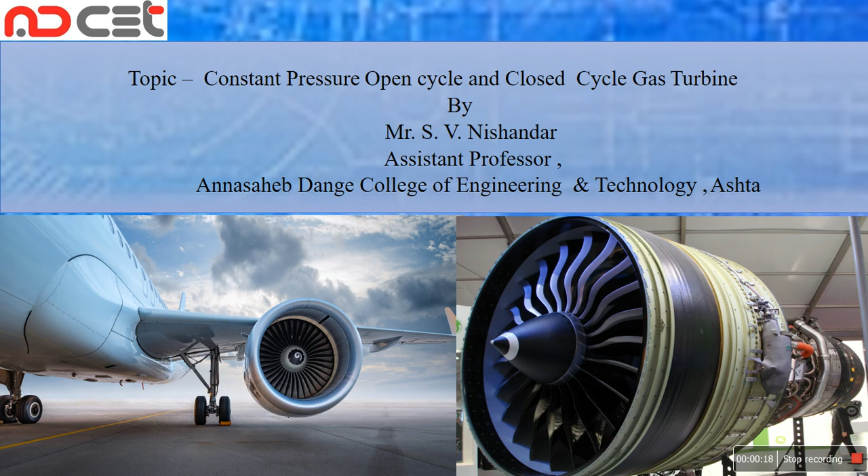In the last lecture, we started a new topic: gas turbine and jet propulsion. Please go through the previous video. Today we cover the remaining part of the constant pressure open cycle gas turbine and the closed cycle gas turbine. In the previous lecture, we discussed the classifications on the basis of operation. Let me briefly revise: open cycle, closed cycle, and which thermodynamic cycle it works on, maybe Brayton, Atkinson, or Ericsson.

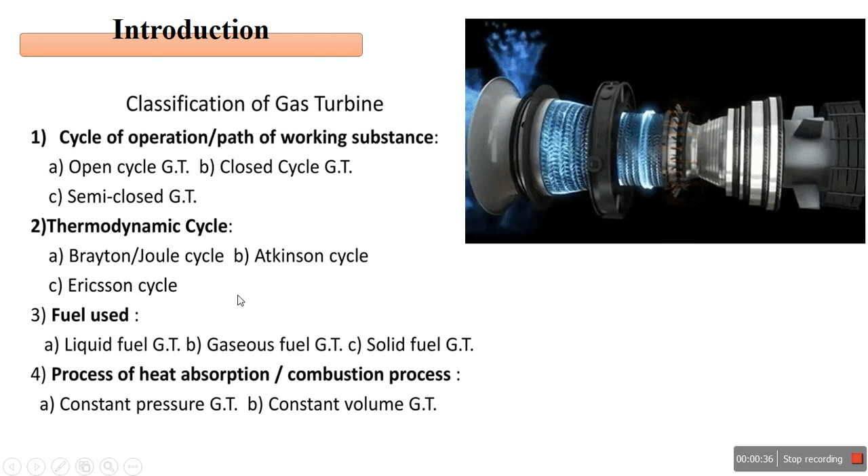The constant pressure open cycle gas turbine consists of three main components: compressor, combustion chamber, and the gas turbine. There are two applications, one is in the wings of aeroplanes as turboprop engines, and it is also utilized in stationary electric grids for generating electricity.

If we draw the open cycle gas turbine PV-TS diagram, a number of students make the mistake of joining the line from 4 to 1, because the cycle is open. The exhaust from the turbine can't be used again and again.

From 1 to 2 there is isentropic compression, carried out by an axial flow compressor or a centrifugal compressor. I'll show in animation the axial flow compressor. If you observe, a number of blades are mounted on a shaft. Some blades are alternately stationary and some are rotating continuously. Mostly the stationary blades are placed in the casing and the rotating blades are mounted on the shaft. That is the axial flow compressor. So 1 to 2 is isentropic compression.

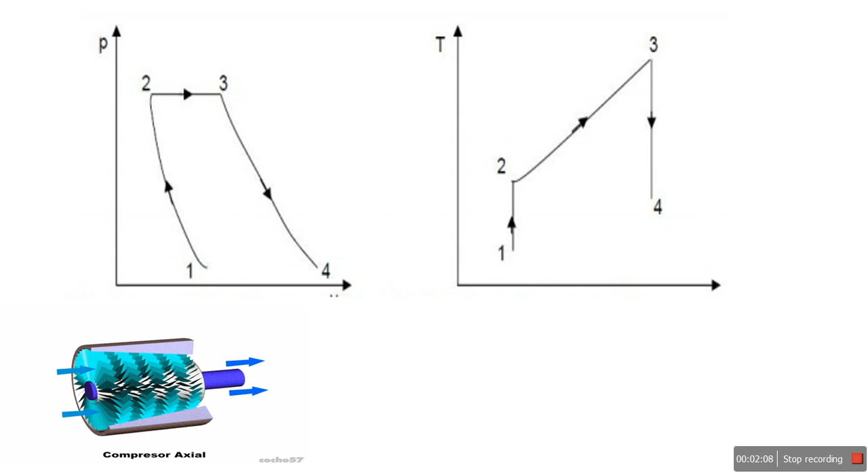From 2 to 3, why is it called a constant pressure cycle? There is fuel injected in the combustion chamber. Out of 100% air, only 25% is utilized for combustion purposes, and that combustion is carried out in the inner space. The combustion chamber has an inner space and an outer space. In the inner space, combustion is carried out using only 25% air, called primary air, and the remaining 75% is called secondary air, used to cool the combustion chamber.

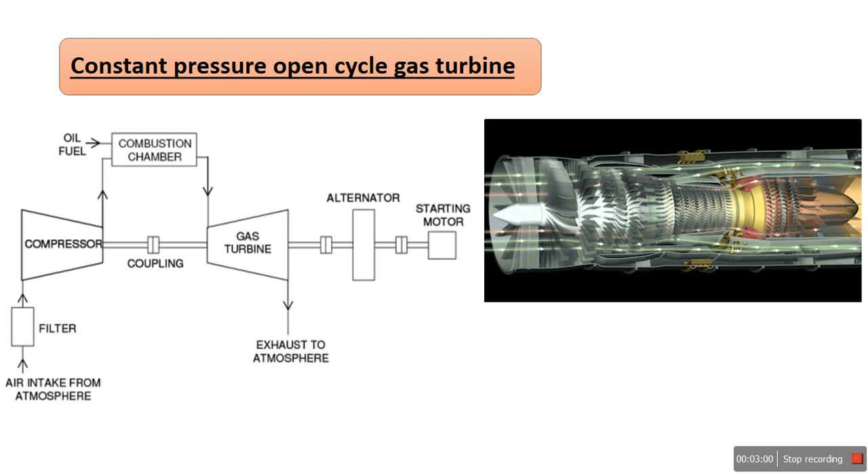If you use 100% air, the temperature would go to around 2000 degrees Celsius. Because of material considerations and temperature limits, we only utilize 25% air, so the temperature is around 800 degrees Celsius. We maintain this temperature because the secondary air cools the combustion chamber.

That addition of heat happens with fuel injected at constant pressure. The natural gas and oil directly contact the compressed air, which is very important as compared to the closed cycle. As we'll discuss in coming slides, the fuel and compressed air come into direct contact. So our limitation is that the air or gas used must have proper properties, because it affects the turbine blades or components. So be careful that the gas or air is properly filtered and has proper chemical composition.

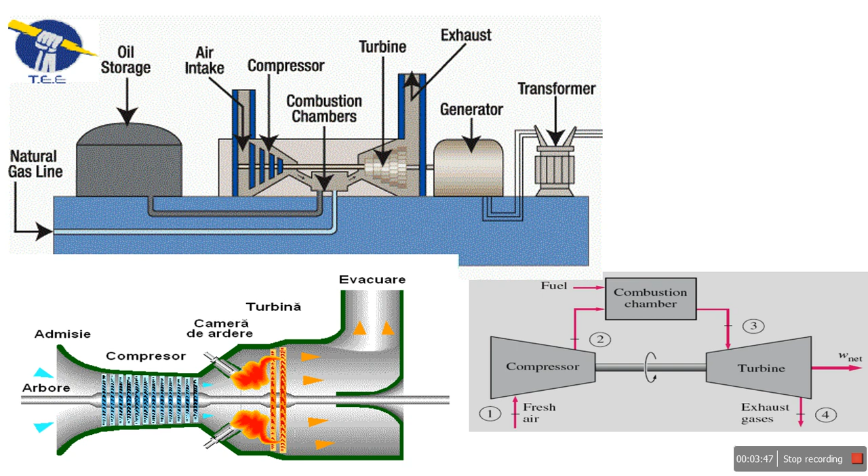Now let's see an animation here. On the wings, as we saw in the first slide, now we see how it works in the case of aeroplanes.

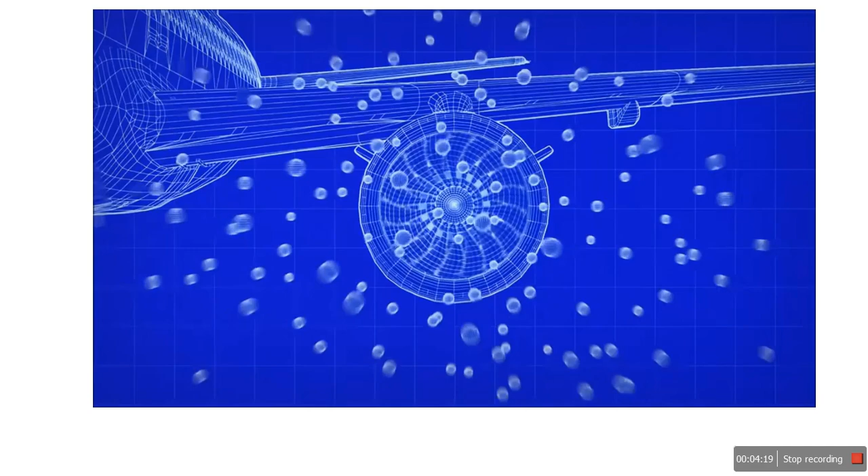We see this is a very fast process. In the further video we'll slow it down to show what actually happens, step by step. This whole section is now divided into four parts: compressor, combustion chamber, turbine, and nozzle. This is an important part, it works on the principle of Newton's third law: for every action there is an equal and opposite reaction.

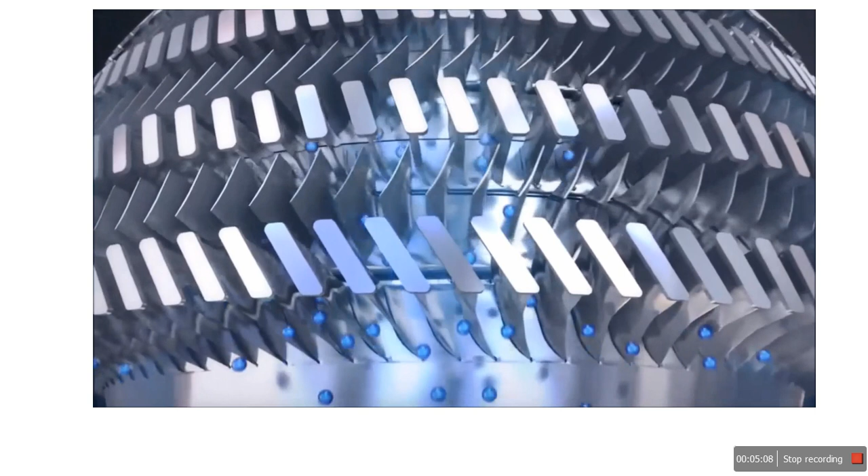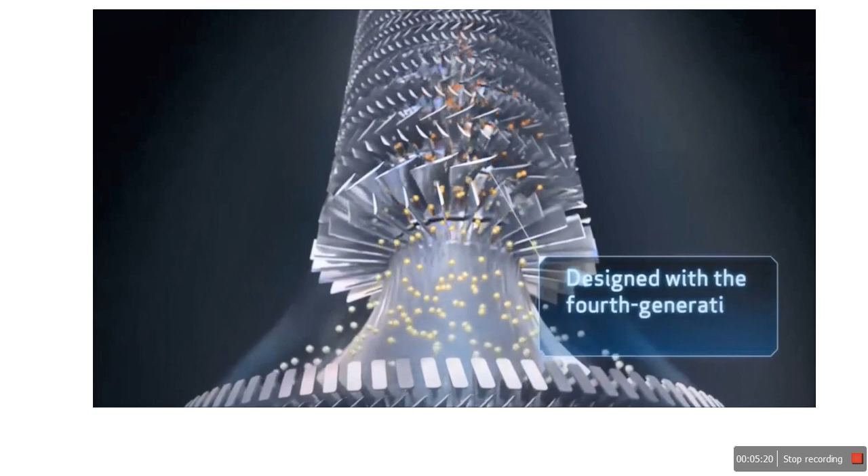When the axial flow compressor starts, it sucks in atmospheric air, which then flows or is squeezed axially over the compressor. The blades of the compressor, as we see in the video, are made of carbon fiber. Squeezing occurs through rotating blades and stationary blades. Initially air flows over the low pressure compressor, then flows over the high pressure compressor, similar to a two-stage compressor. Initially the volume of air is large, so the compressor has a large volume to handle it before further compression.

After compression, that high pressure, high temperature air now goes through the combustion chamber where fuel is injected, the particles of kerosene as we see. This further forms the combustible product. If we see the chemical composition shown in the animation, there are particles, high pressure high temperature air particles, and droplets of kerosene.

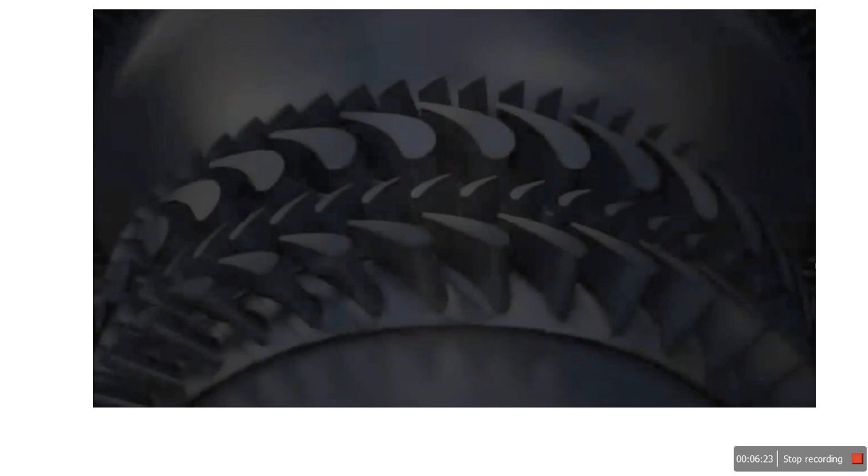There's a random movement of the fuel droplets and the compressed air. Now they are ready to expand in the turbine. Okay, now they flow over the turbines. We get the mechanical power. Some of the mechanical power is utilized to run the compressor again.

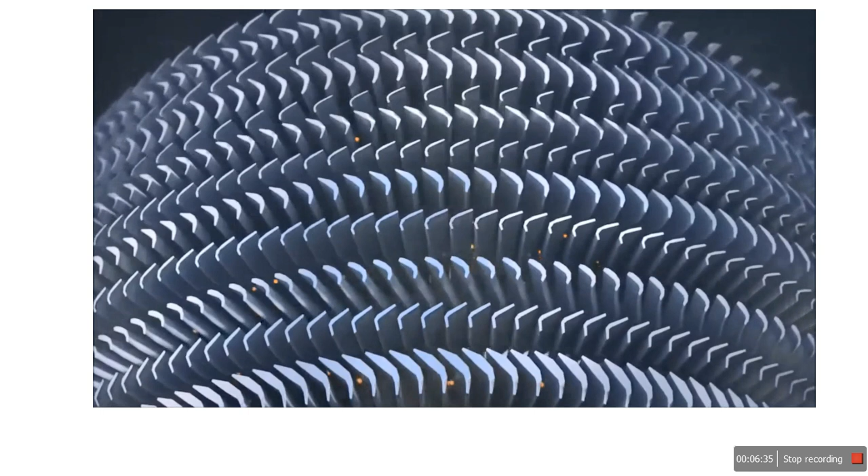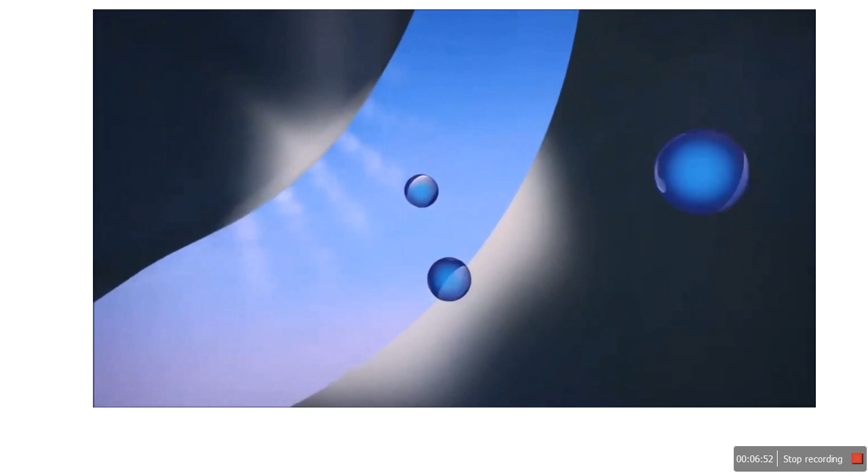Okay, that's gas turbines. After that, the exhaust gas then again expands in the nozzle, which propels the plane. Okay, further we discuss in the coming videos how it works. I have this video mentioned here because of some applications, so we know actually how it works.

I again repeat, you compress the air up to 40 bar, and the addition of heat to that compressed air is carried out externally over the CC. So the main advantage is that in a closed cycle gas turbine we can use any fuel, maybe solid fuel, liquid fuel, low cost fuel, because there is no direct contact with the compressed air. But in the open cycle we use proper fuel, because of material considerations it affects the life of the blades, turbines or the compartment.

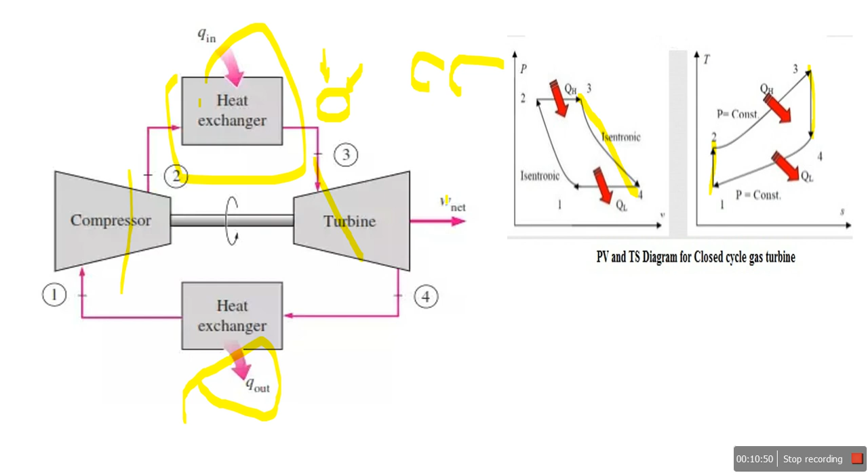Okay. Through this video, I covered the open cycle gas turbine and the closed cycle gas turbine.